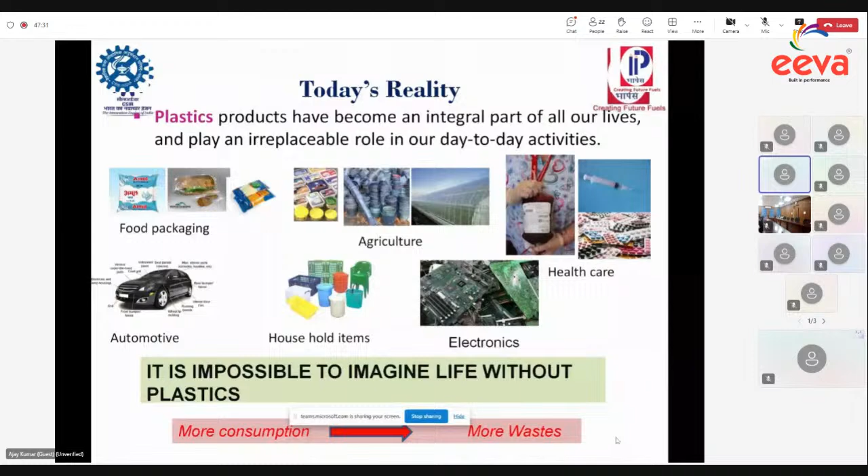Since plastic is non-biodegradable, we have to find a solution for disposal, because it creates problems for our society, health, human beings, animals, and the environment. We have conventional waste management methods like landfilling, incineration, and mechanical recycling, which you are well aware of, so I won't go into detail. Here, what IIP offers is chemical recycling.

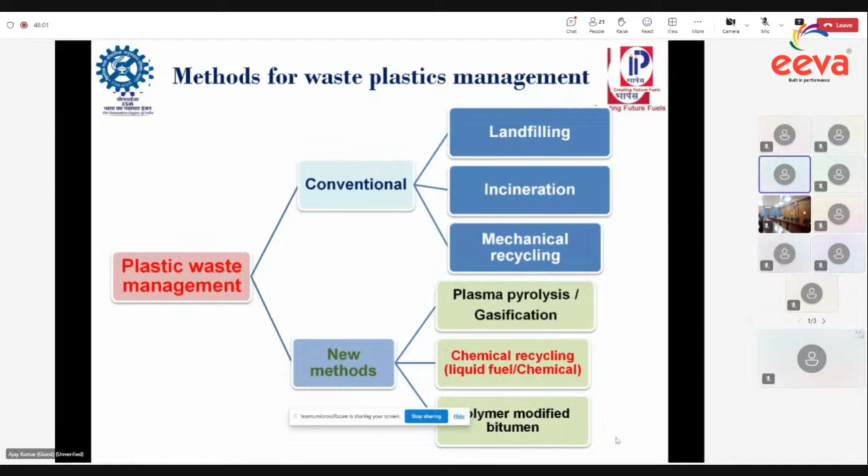So what is chemical recycling? As you know, the origin of plastic production is crude oil, so we want to recycle from plastic back to crude oil. This is the permanent solution. If you see conventional methods like incineration or mechanical recycling, these will not give a permanent solution. Our emphasis is to convert plastic into crude, like pyro oil, and then convert that into useful products like petrol or diesel.

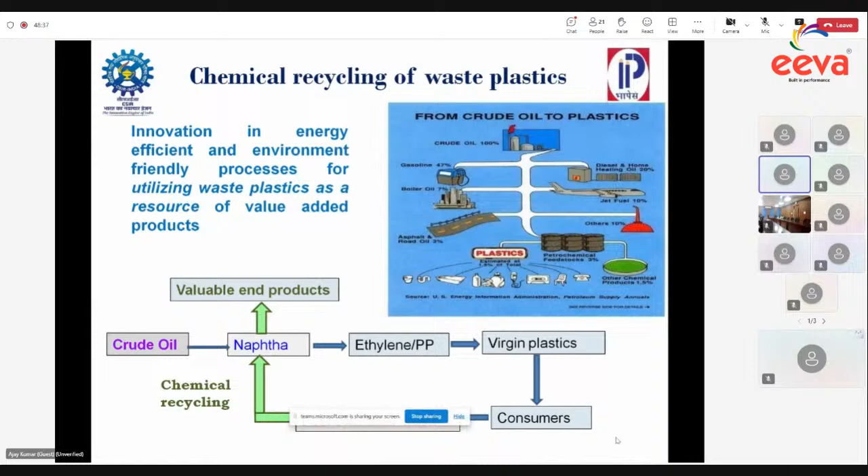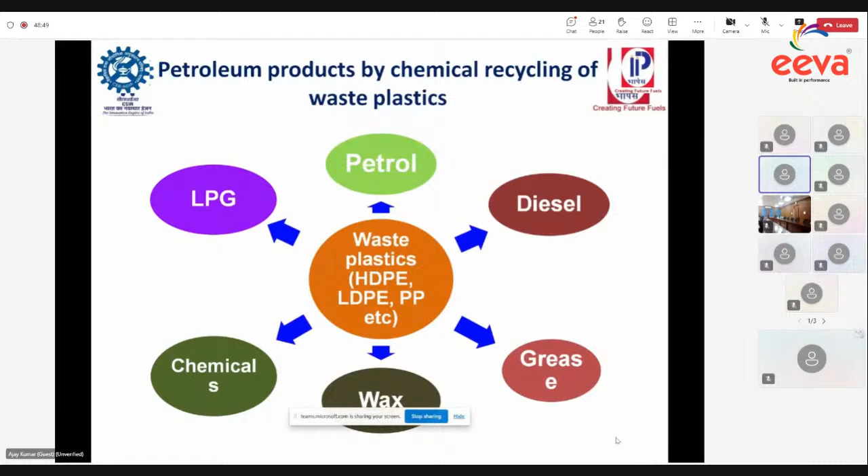So what types of products does IIP offer from chemical recycling of waste plastic? Products like petrol, diesel, greases, waxes, and chemicals.

So what is the CSIR-IIP GAIL technology? What types of feed are required for this process? All polyethylene and polypropylene, PE and PP, are useful for this process. We are avoiding PET bottles and PVC and such plastics, because polyethylene and polypropylene make up almost 60 to 70% of the total MSW plastic. So here we are targeting only polyethylene and polypropylene.

As you know, this MSW plastic contains foreign materials like organic contaminants, so we have to pre-treat this plastic so it can be useful for our process.

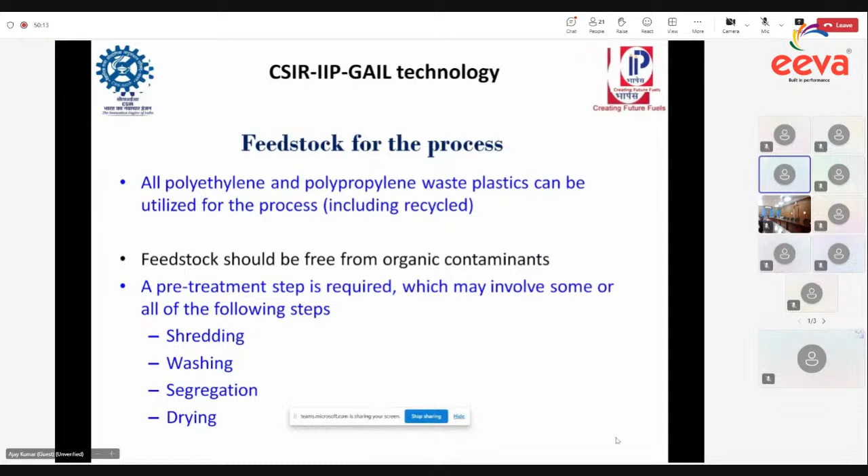There are a number of steps for pre-treatment. First, dust blowing, then shredding of the plastic into smaller pieces, then water washing, then drying, and then agglomeration. These are the steps for pre-treatment of our waste plastic, and this feed is then useful for our process. So what is the CSIR-IIP GAIL technology?

In GAIL technology, if you take 1 kg of plastic, you will get either gasoline or diesel or aromatics along with LPG.

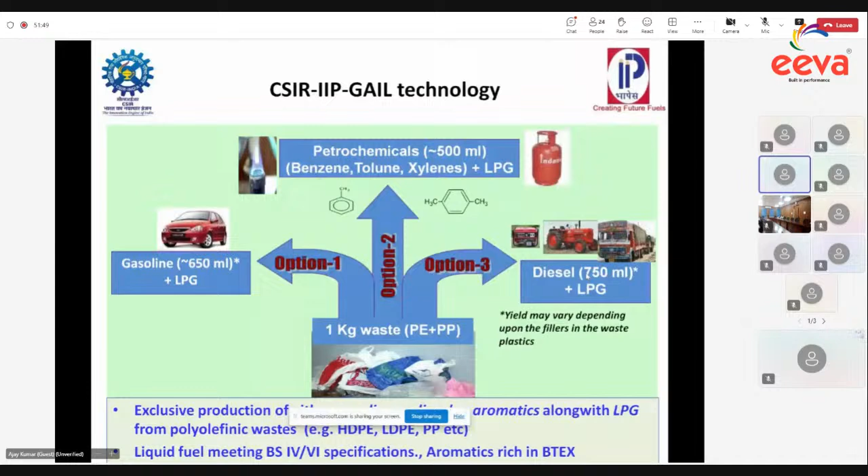So what is the process? Firstly we have to pre-treat the waste plastic, whatever we get from the municipality or MSW, from any source. Then we pyrolyze it, followed by the catalytic reactor, and then fractionation. Then we get products like gasoline or diesel.

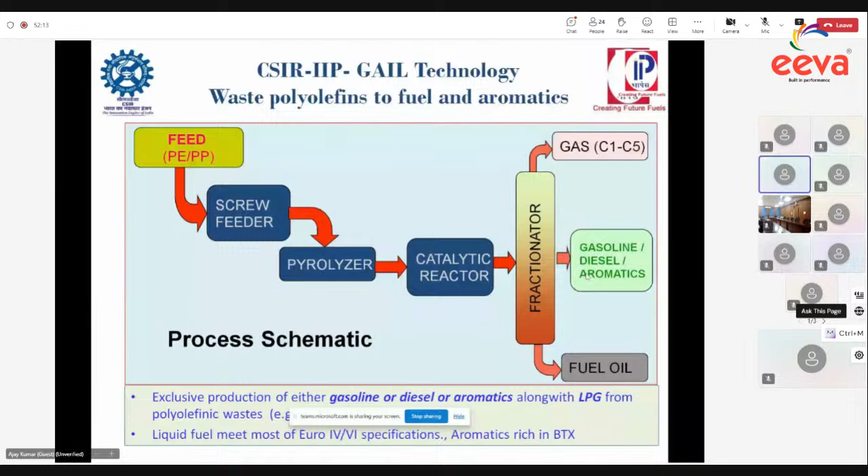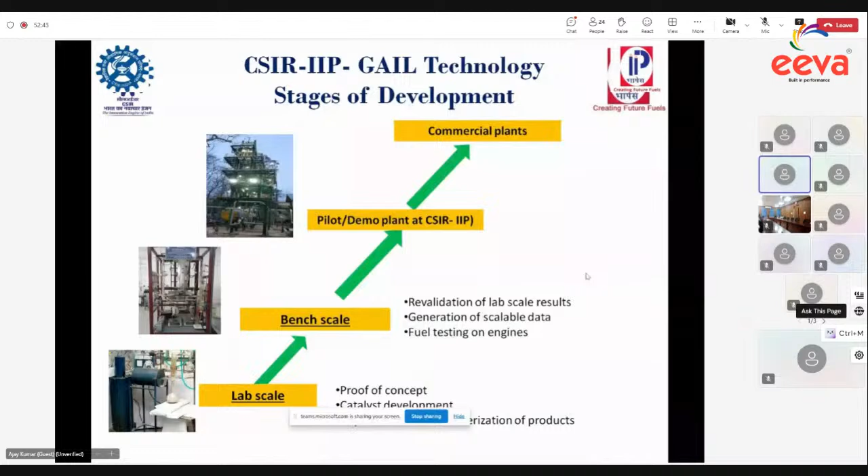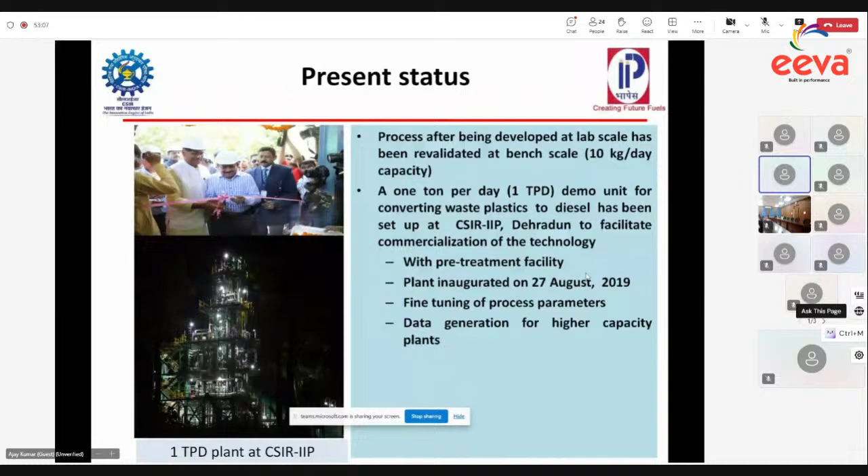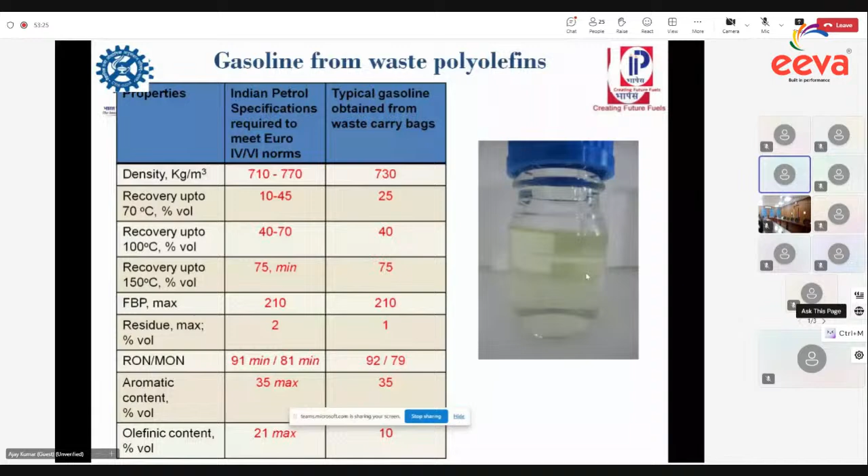These are some properties. As you know, for diesel or petrol we have to meet BS4 or BS6 standard norms in terms of density, viscosity, final boiling point, aromatic content, all these things. In our process, these properties are met. This is for diesel produced from waste plastics.

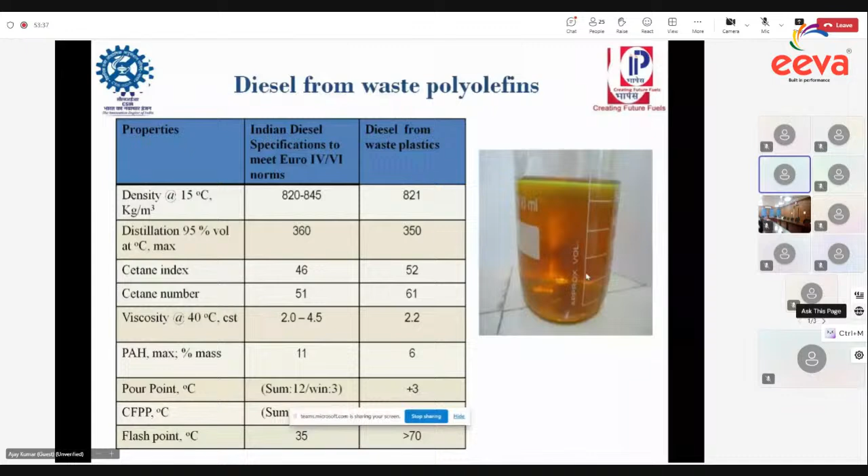We also did some emission performance testing of these waste plastic fuels. We have the laboratory in IIP, so we check emissions like particulates, carbon dioxide, all these things. It is matching with conventional diesel obtained from the petrol pump.

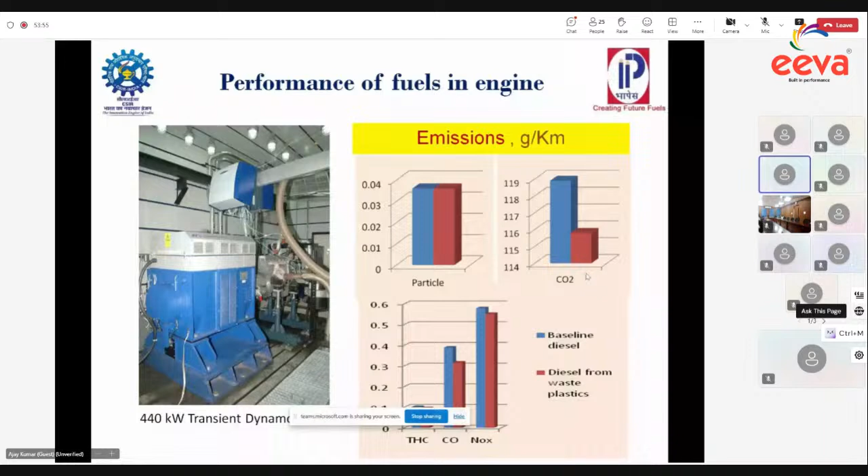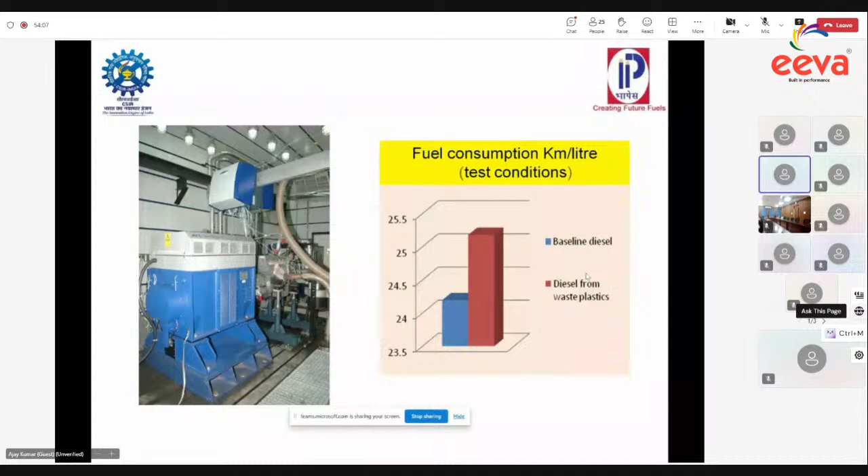This is just the efficiency of the fuel in terms of kilometers per liter. It is at par with conventional diesel obtained from the petrol pump.

We have also developed technology from waste plastic to wax and greases. In terms of economics, we cannot increase the price of diesel or petrol due to social causes. So we have developed a way to produce petroleum waxes or greases which are costlier than diesel or petrol. Their economics is better compared to petrol or diesel. So we have also developed this technology.

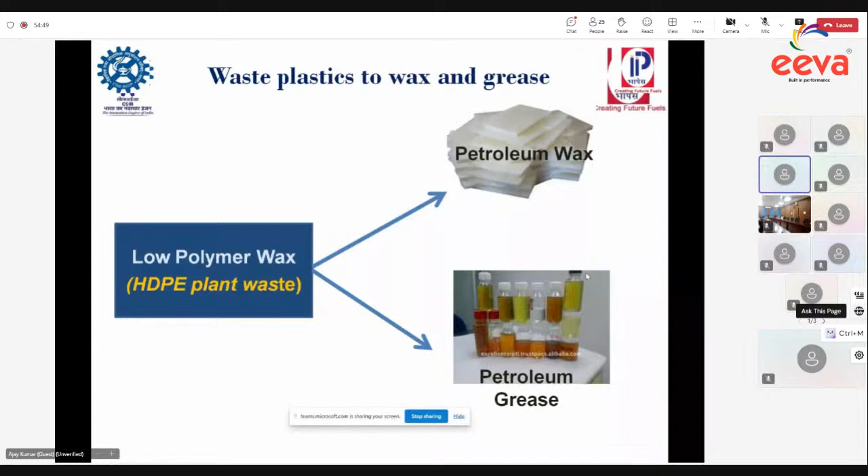In terms of utility requirement, manpower requirement, and land requirement, we need a pretreatment unit as well as a process unit. Land for the pretreatment unit is 2 acres. For the conversion unit, diesel conversion requires 1 acre. We also need electrical power, water, and LPG for starting fuels.

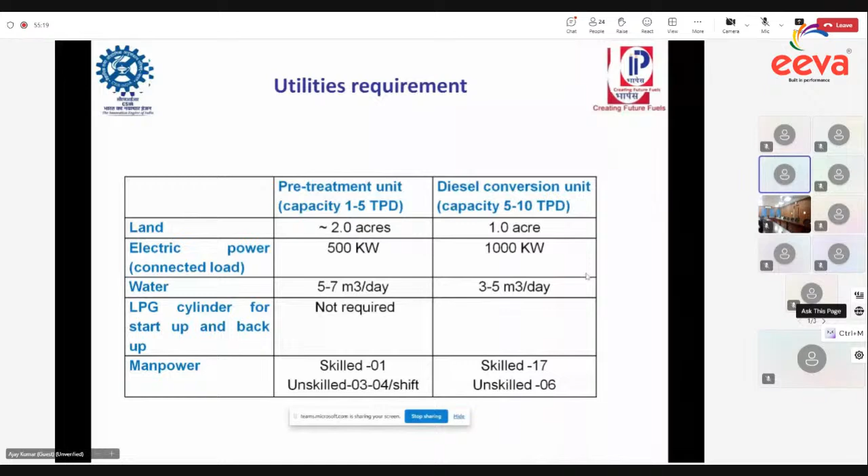So lastly, we conclude that this is the process to produce diesel and petrol and solve the waste plastic disposal problem in an environment-friendly manner.

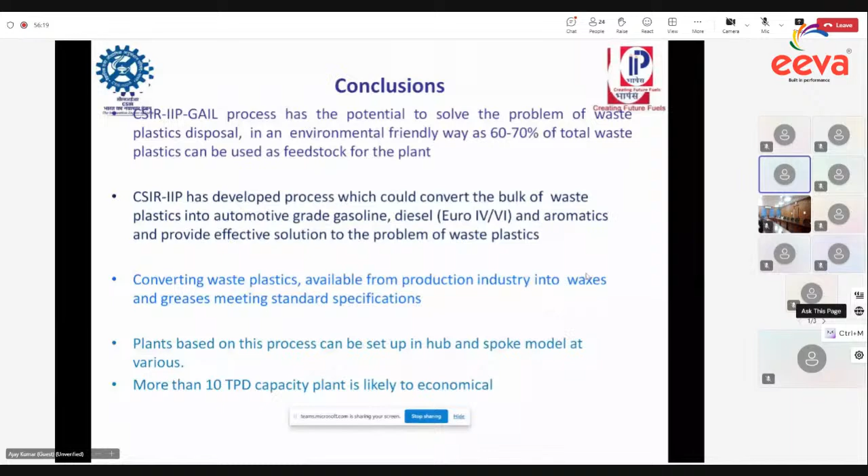So this is the existing facility, as you are seeing the 1 TPD plant. We also have a glass reactor, lab scale reactor, and bench scale system in our IIP campus.

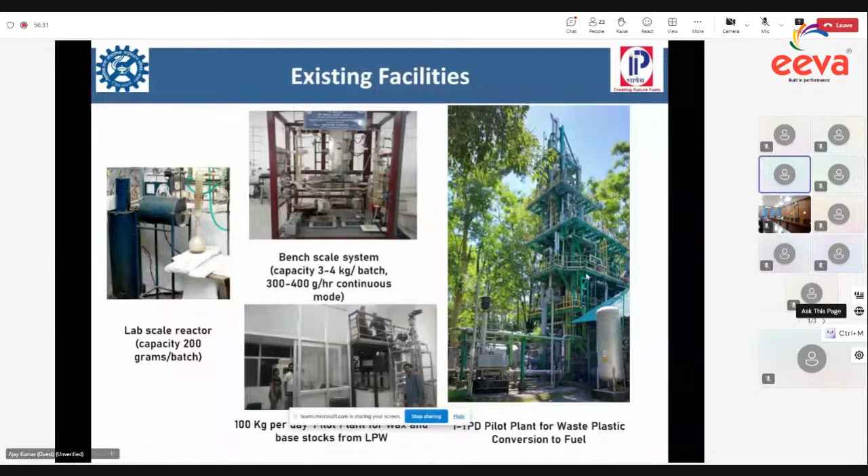These are the teams who are working day and night generating the data. Thank you all, this is it.

Thank you, Dr. Ajay. PPDC Agra, any comments? Or any of your partners, if they want to say anything?

Thank you ma'am, thank you Dr. Ajay. Just one question - I think in the document we received regarding this idea, the capex investment is around 70 crores. Is it so? And the operational expenses mentioned in the document is 11 crores.

Yes, this is for a 10 TPD plant. Okay, so this is about a 10 ton per day plant. Okay, thank you.

This plant is like this - if you come to IIP and want to see the plant, it is like a refinery because we are producing automotive grade fuel like diesel and petrol. So it is like a refinery. There are lots of equipment, and we have to maintain safety, all these things, when setting up the plant. It is not like the conventional plants you may have seen from China - it is not like that. So you are welcome to visit IIP Dehradun to see the plants and get the feeling of them.

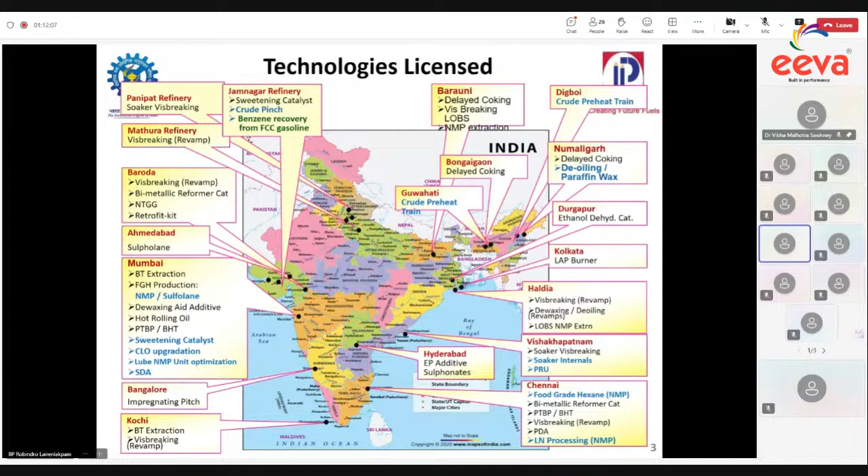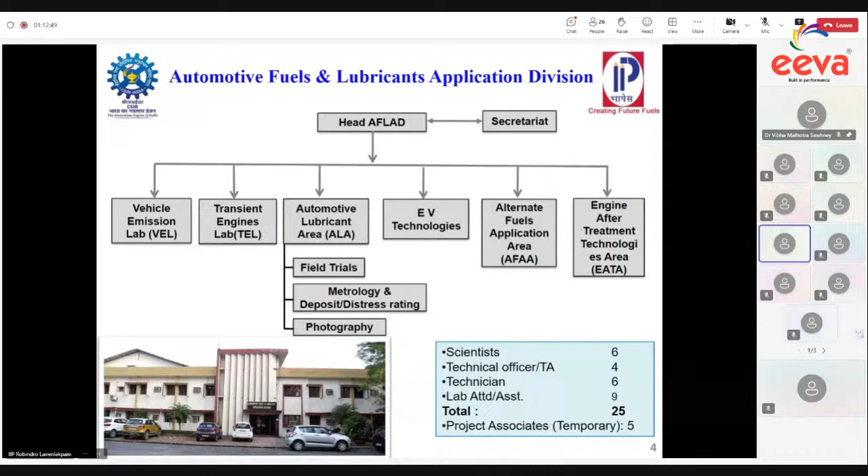Moving on, we have different divisions, and the division where I belong is called Automotive Fuels and Lubricant Application Division. We deal with the applied area where different fuels are tested for their performance and compatibility with materials and so on. You might have heard of E20, E10, plus the upcoming flex fuel. So there, your petroleum product is not 100% - it has been mixed with the alternative fuel so that we reduce the petroleum product.

And the introduction about our technology: there are thousands of diesel autos of L5 category already on road, and they are causing noise as well as air pollution in cities, including capital cities, tier 2 and tier 3 cities, which lead to associated health issues, because diesel autos are emitting high amounts of PM10 and PM2.5. Those emissions are very harmful to human health.

So we have devised one device which is still under evaluation stage, and with such an indigenous device we can convert existing diesel autos into electric autos, which will mitigate the unhealthy level of air and noise pollution in state capitals as well as tier 2 and tier 3 cities. Apart from that, this product will be import substitution, and it aligns with India's energy independence goals of Viksit Bharat as well as Atmanirbhar.

It will also contribute to our target of 30% electric vehicles on road by 2030. At the same time, this kit can be used for any new electric autos designed and developed by different entities. So this kit will be common for two purposes - one is for new three-wheelers, and one is for electrification of existing diesel autos into electric vehicles.

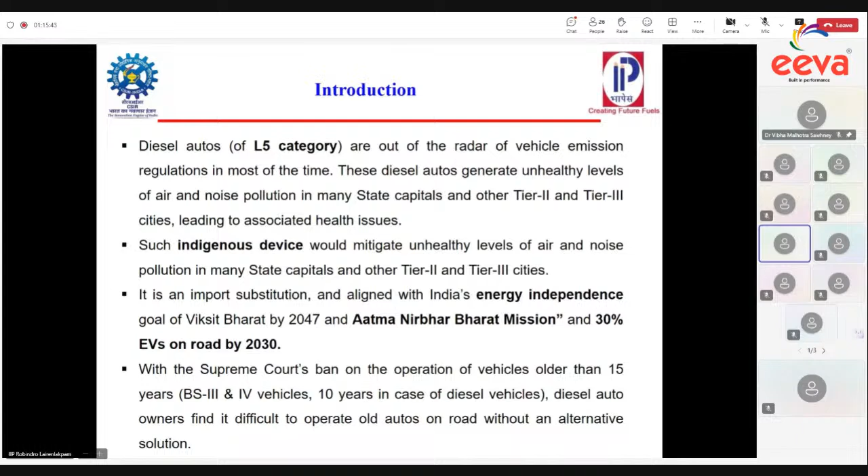So this is the problem. At the same time, with this kit, we are extending the operational life of the diesel autos, and giving more earning time for the owners and the diesel auto operators.

Our target is to have the L5 category vehicle, L5 passenger as well as cargo. The cargo vehicles are used for last mile delivery by different commercial platforms like Amazon, and at the same time for new auto rickshaws.

So just to understand the subsystem level, this diagram shows you how the subsystems are mounted inside a vehicle, and what are the major subsystems. We have the major parts: electric motor, electric drive, a controller, battery, then DC-DC converter, then vehicle electrical appliances. These are the major parts of an electric vehicle.

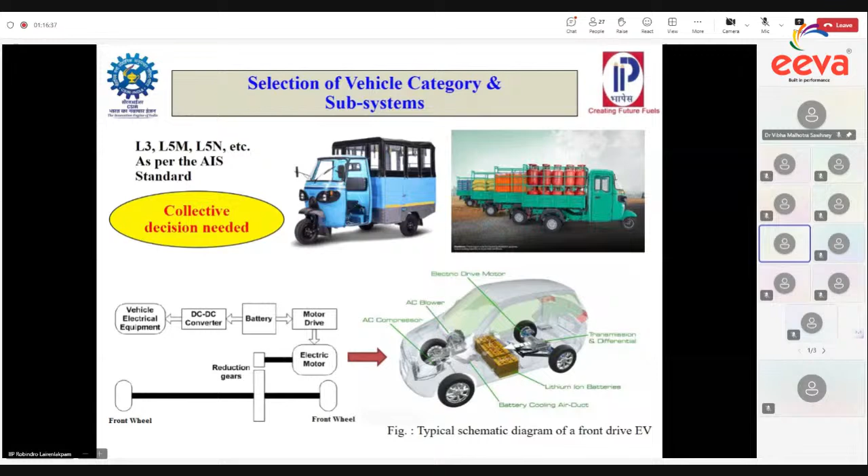Moving on, we need to have a thorough study for the EV motor selection, depending on the vehicle category, whether it is cargo or passenger, because the weight and other vehicle dynamics will be different. So the selection of EV motor is very important from the perspective of sustainability and efficiency.

From the sustainability perspective, permanent magnet motors are not going to be sustainable because of the use of rare earth material, which is not much available in India. So at the end of the day, we may be importing the rare earth material, the magnets, from other countries, and then we'll end up with another problem. That's why in our study we are using non-rare earth electric motors, so that it will create a sustainable ecosystem for electric mobility.

While selecting and designing the electric motor, we need to see certain factors like frequent start-stop, high rate of acceleration and deceleration depending on different drivers' behavior, then high torque at low speed, for example hill climbing or flyover climbing, which we call road gradient in technical terms, then low torque cruising. These are all factors we need to consider.

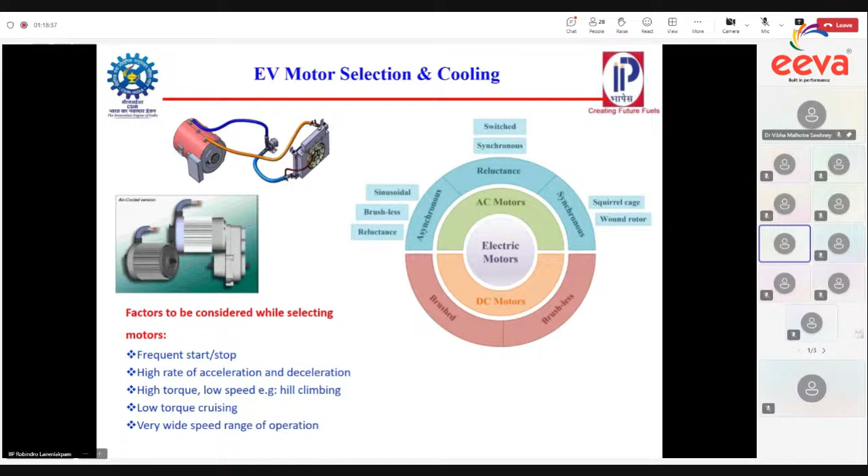We need to see a very wide speed range of operation, so that we can have at least 50 km/h speed. Otherwise, unlike e-rickshaws which have a regulatory limitation of 25 km/h, that causes traffic jams and other undesired things on the road. So these electric autos are different from electric rickshaws because of the load carrying capacity as well as the vehicle speed.

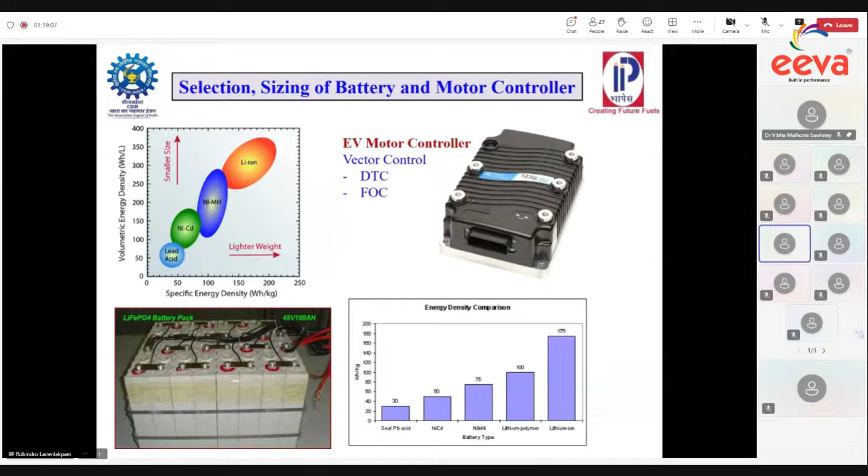Moving on, the selection and sizing of the battery is very important, depending on how much electric mileage we are targeting to achieve - for example, 100 kilometers, 150, or 80 kilometers, and so on. We are using lithium-ion batteries because of the high energy density with a smaller size and many other advantages.

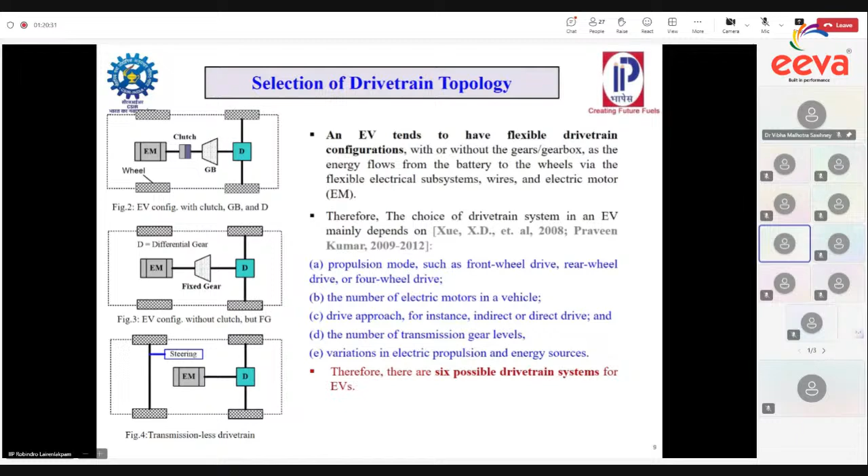Moving on, the fourth one, we are using two electric motors with one common drive shaft. The presence of two electric motors will make it more expensive, and will make the control algorithm very complex.

Then the fifth one, we have two electric motors individually and independently connected to its rear wheel, through a reduction gear. Again, this is all for study and research purposes - commercially and physically it is not available. And the last one, again, we are using two hub electric motors.

The wheel rim itself is the motor, like in an electric two-wheeler or scooty. So these are the different topologies based on our requirement and the techno-economical analysis. We need to select the appropriate topology for our new kit as well as for our new electric vehicle.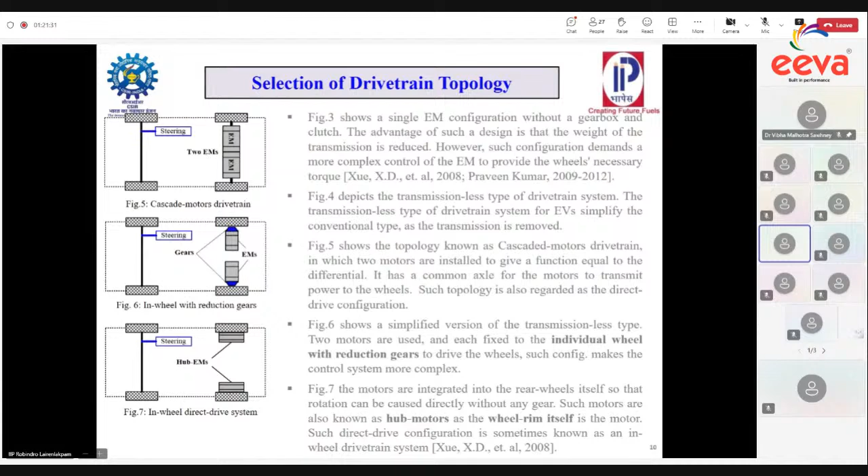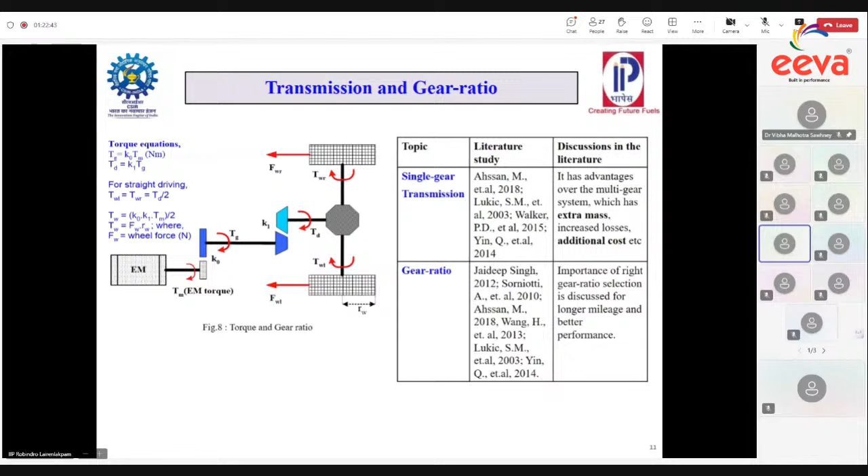Moving on, this is research we did a couple of years ago to check the feasibility of converting an existing IC engine vehicle to an electric vehicle. This was done as per the gazetted notification GSR 167E, which allows converting any existing IC engine vehicle into an electric vehicle, subject to approval and certification of the kit. This conversion process is done as per Automotive Industry Standard 123 Part 3.

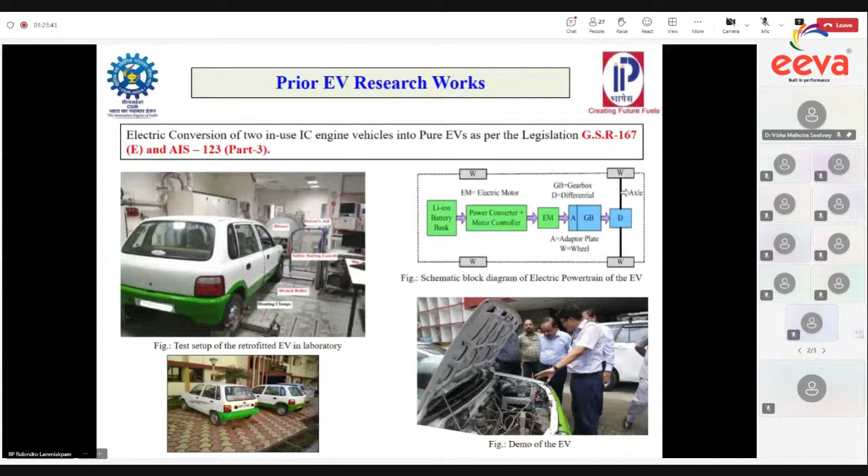This is what we have done in our lab, and we found it very much doable, with a lot of advantages from the techno-economical perspective. As part of that prior research work, we have done these experiments in the laboratory and on road.

Once converted, the vehicle is subjected to road load simulation on a chassis dynamometer and driven with Indian driving cycles common in the automotive industry, like IDC and MIDC, modified Indian driving cycle. We have used different equipment to check vehicle dynamics, safety, and stability.

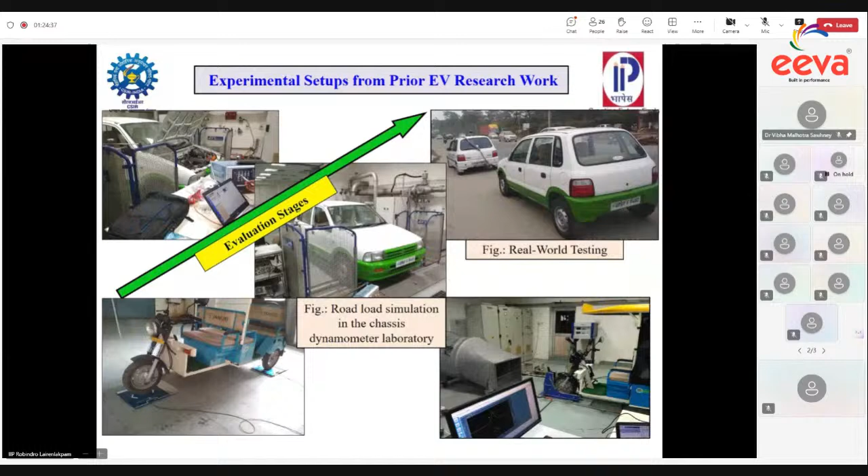For example, once you remove the IC engine and related parts, the original vehicle dynamics is disturbed, so we need to bring the center of gravity back to its original position. That's why we need to measure the new center of gravity, and so on. Then we need to determine new parameters for the retrofitted as well as the new vehicle, like the tractive force, vehicle reference weight, new center of gravity, and so forth.

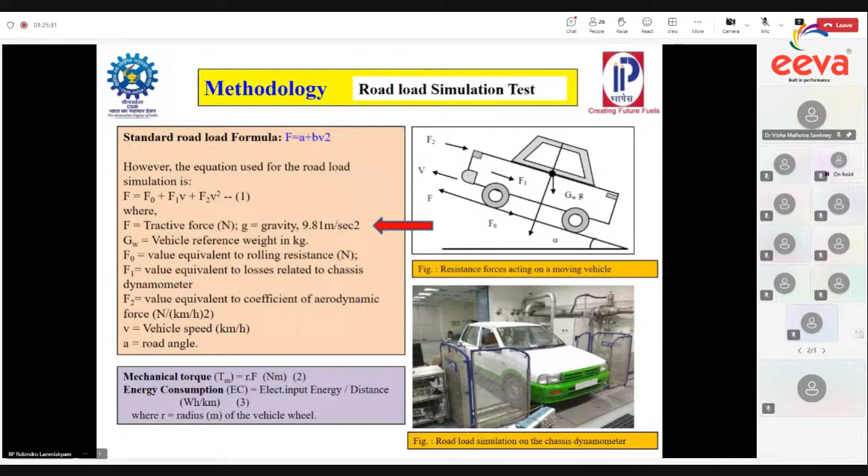Moving on, we used the modified Indian driving cycle during the laboratory test. Throughout the cycle, we collected and recorded electrical parameters like current and voltage of the electric vehicle. Then we analyzed areas of improvement, energy consumption, maximum current flow, and so on.

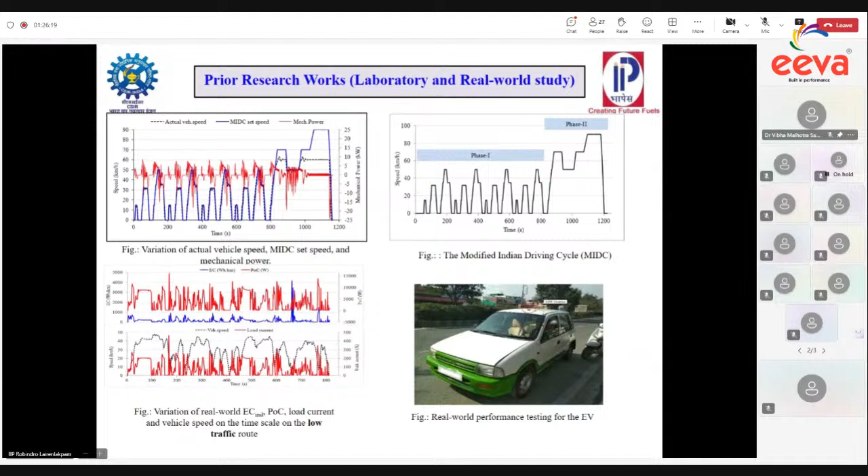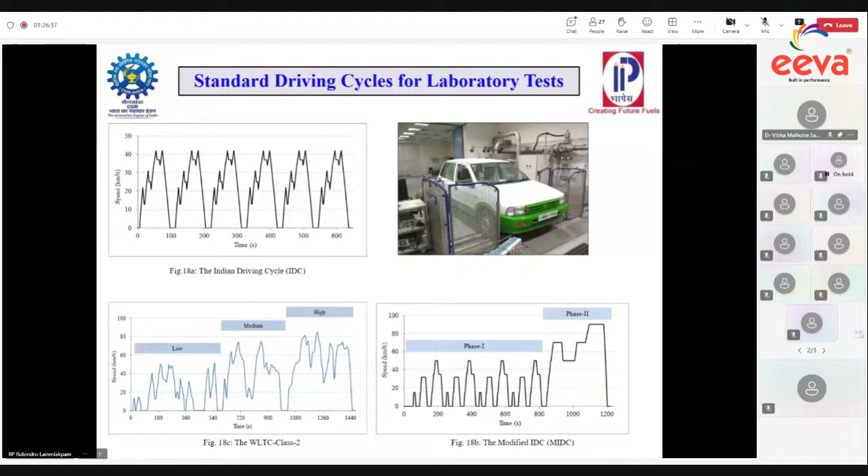Likewise, the same vehicle is put through a real world test on actual road. We observe energy consumption and other electrical parameters, then compare the laboratory data with the real world data to find the gap and make improvements. These are the standard driving cycles used in our laboratory and across all automotive industries in the country. WLTC is the new cycle used worldwide, and India is now going to adopt it.

This is a very important part: once we have the new or retrofitted vehicle, it has to go through regulatory compliance tests, using all the methods defined under the Automotive Industry Standard. It has to pass these tests, and only then will testing agencies give certification for launch and commercialization.

This is done under the CMVR homologation requirement, the Central Motor Vehicle rules homologation. There are many legislations and procedures that need to be followed for new vehicles as well as for retrofitted vehicles. For retrofitted vehicles, we need to go through AIS 123 part 3, which defines what to do and what procedures to follow.

Our target is to have the landing price around 1.5 lakhs per kit. This target is driven largely by battery cost. Batteries are not mass produced in India right now; mostly they are imported, though certain companies are manufacturing in India with Indian technologies. Once battery cost is reduced significantly, the cost of the kit will also get reduced.

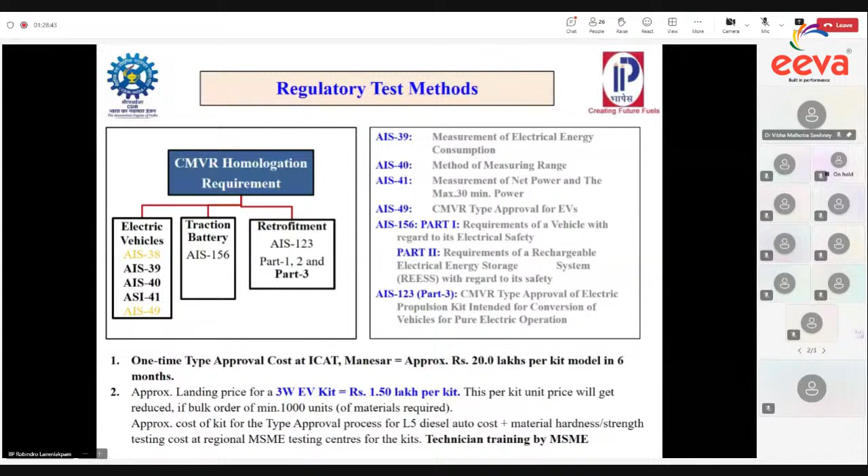At the same time, during retrofitting, technicians and fitters need to be trained on how to fit, repair, and maintain these systems. Such training can be conducted at regional MSME centers through MOUs, utilizing their existing infrastructure for subsystem fabrication. We can work with MSMEs for human resource training and for imparting subsystem-level training on handling, repairing, fitting, and related tasks.

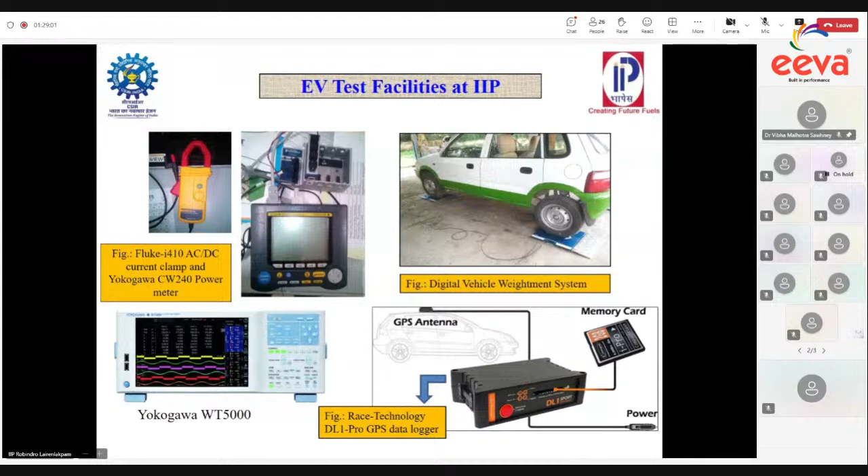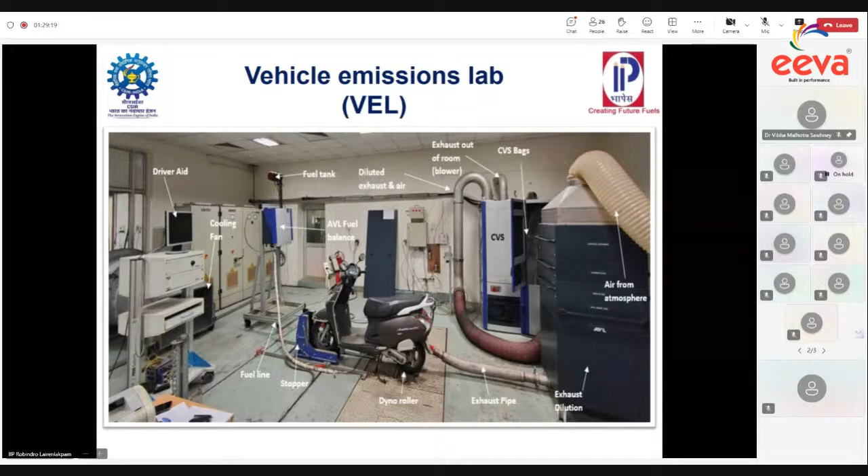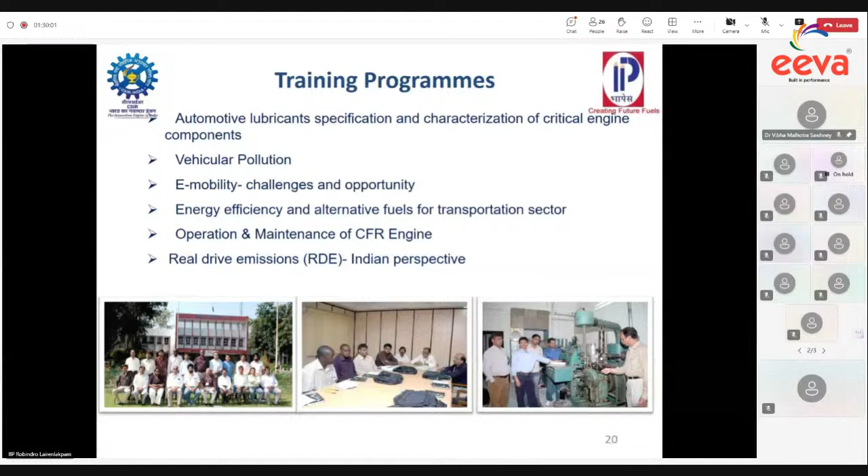Our division also conducts training courses every year. Even now, some transport officials are on our campus, and we are imparting training to them, sharing the latest policies, updates from the ministry, and the latest technology. This is one area where we can collaborate with MSME centers for training technicians and fitters.

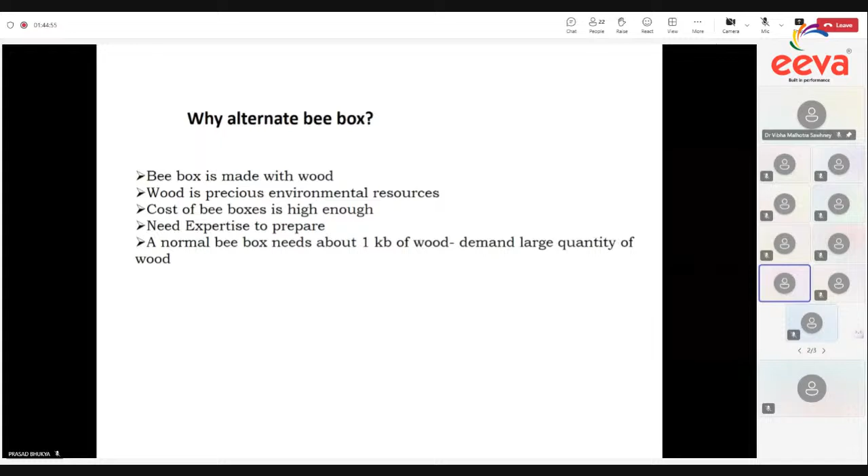It needs some skill to prepare the bee box. Although in India we know different measurements of honeybee boxes, like A type, B type, it needs some skill to prepare these boxes. That's why we thought of some innovation regarding low-cost honeybee boxes. So this is a low-cost bee box, and we completely removed the use of wood.

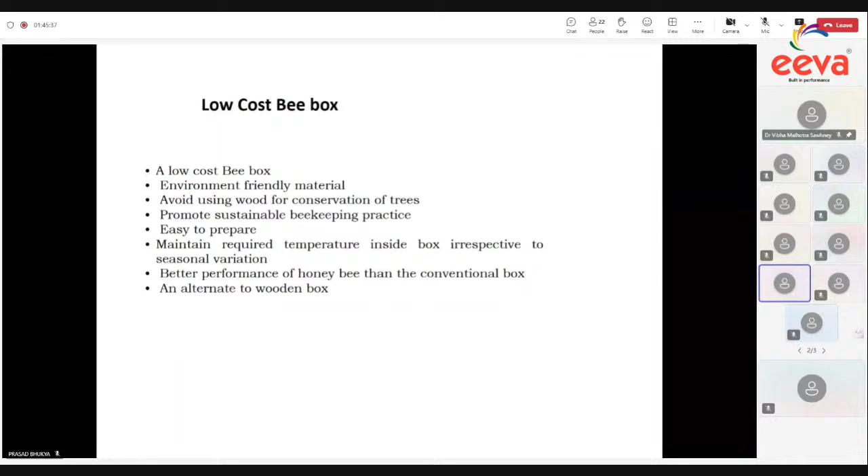We completely removed the use of wood in these bee boxes. Whatever material we use is environment friendly, basically bamboo based, which helps for sustainable beekeeping practices. The bee boxes are easy to prepare because the measurements we took are as per Indian standard. We have not changed any measurement for Apis cerana or Apis mellifera; we just substitute the material, using other material instead of wood.

As per our past experience and research, these new honeybee boxes completely maintain the temperature inside, because temperature and humidity are very crucial for honeybees, as honeybee is a poikilothermic insect so temperature is essential. Irrespective of seasonal variation, it maintains the temperature around 32 to 33 degrees Celsius, and it gives somewhat better performance than conventional bee boxes.

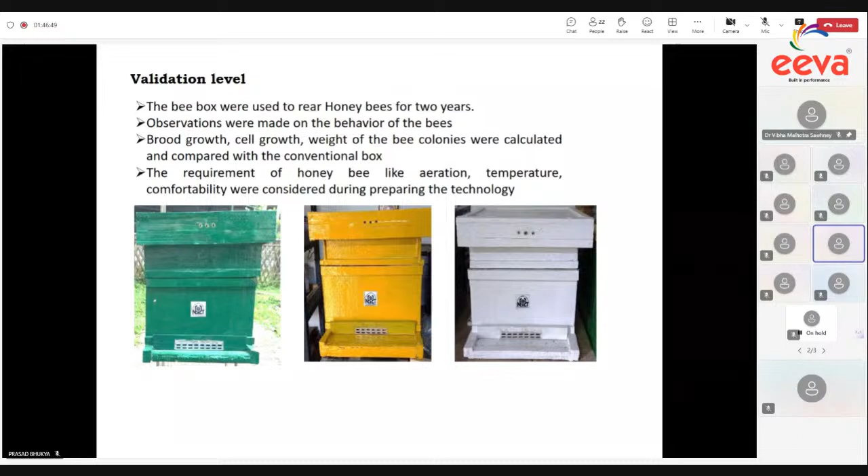You could see some of the bee boxes here. The box we use to rear the honeybee Apis cerana, because Apis cerana is very much prevalent in the Northeast, and we observe the behavior of the honeybee, because this is very important.

You may have heard that around 30-40% of honeybee colonies are now disappearing from beehives. We completely observed the behavior, and it is very clear and good, because we got very good brood growth, brood health, cell growth, and weight of the bee colonies. Compared to conventional bee boxes, it provides complete aeration, temperature, and comfortability, which is very much required by the honeybee.

These are our new bee boxes we prepared, and these have already been commercially transferred to 4 parties, basically NGOs and self-help groups. Some photographs are shown here; they prepare these themselves and distribute them to farmers for rearing honeybees.

One advantage is that it is very easy to prepare. You do not need any industrial scale concentrated unit of production, because if we teach the farmers, they can prepare these themselves.

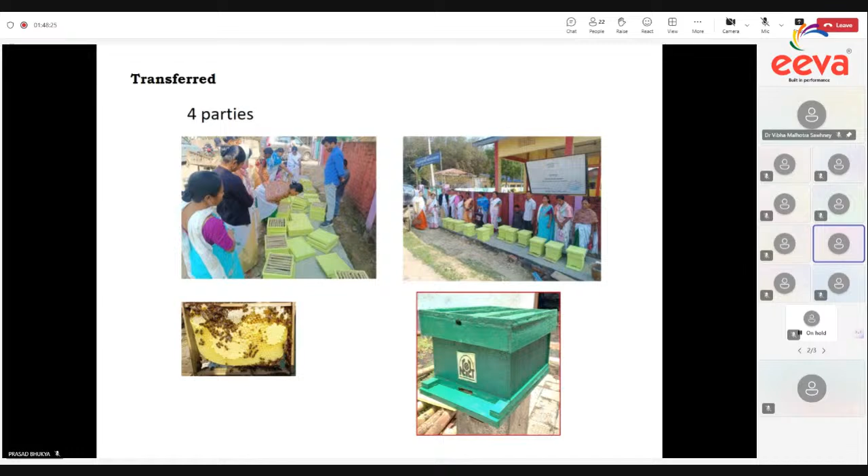These are some photographs I've shown you, already transferred to different NGOs. Here is another of these bee boxes, where you can see how it facilitates colony growth.

These honeybee boxes were inaugurated by our former Director General Sir in October 2021, who formally inaugurated these honeybee boxes. You could see here that in our farm we maintain several such bee boxes along with honeybee colonies.

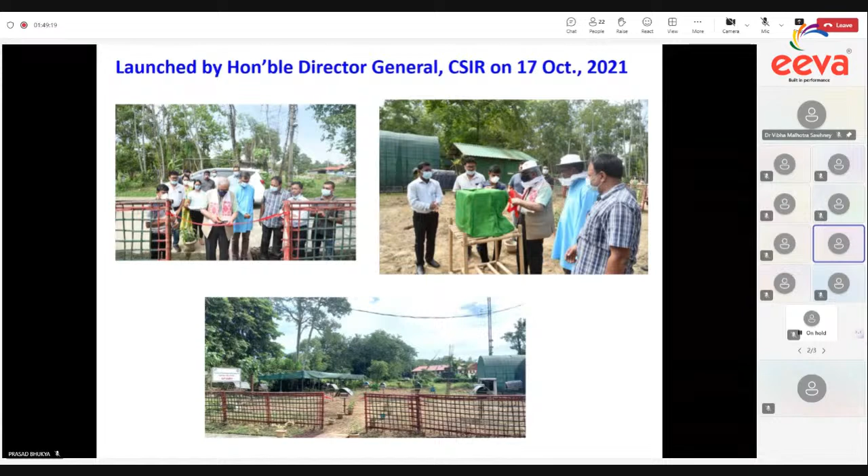So this is briefly it. I'd like to inform about the new honeybee boxes - we are now preparing these Apis mellifera bee boxes, which we plan to send to Lucknow to CSIR-NBRI for a CSIR floriculture mission project, and it is prepared by one entrepreneur in our facility under our supervision.

Another two parties, one from Chennai and one from Assam, have already applied for getting this new technology. So briefly, this is it, but I am open for any questions.

Good afternoon, I am going to speak about Expert Eye-on-Pellet technology - the automatic process control system for pelletization disc in steel industry. Myself, Dr. Santosh Kumar Behera, and with me Dr. Debi Prasad Das, my head, is available here.

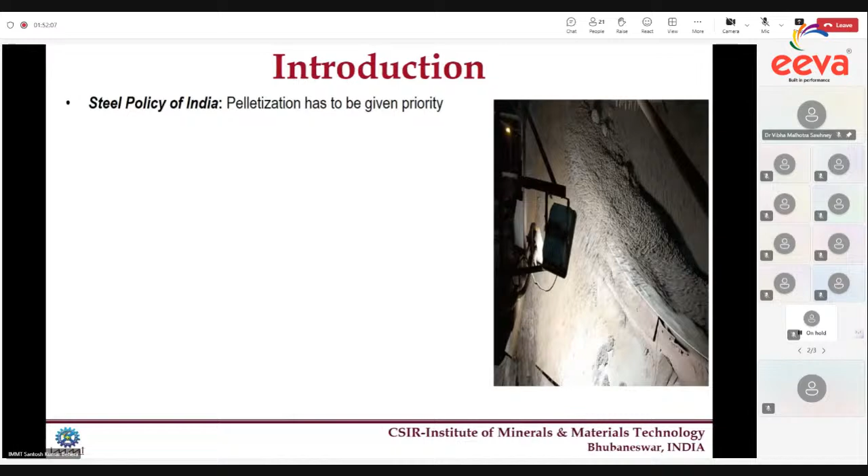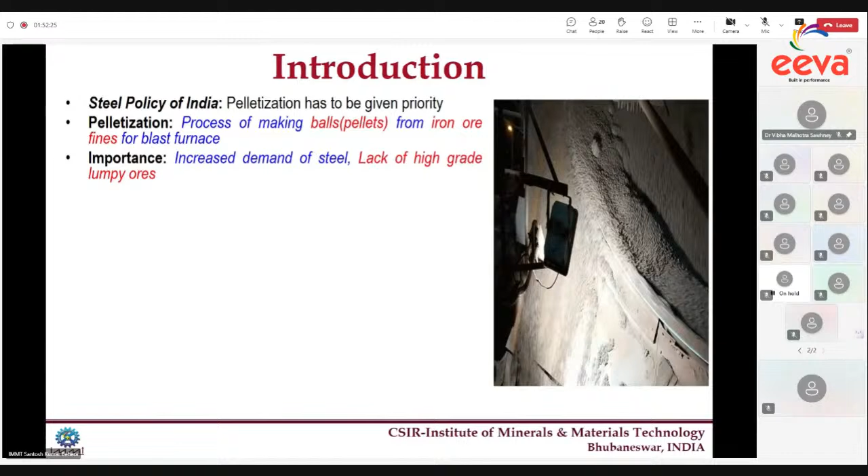Before going to technology, I'll explain pelletization and its importance. As per steel policy of India, pelletization has to be given priority. Pelletization is a process of making balls, called pellets, from iron fines for blast furnace. There's increased demand for steel, but a lack of high-grade lumpy ores - we are getting fines and low-grade iron ores. The pellets formed by rotating disc are sieved to desired size, which is 8 to 16 mm; less than 8 or more than 16 is undesired.

You have to recycle once again. That is, we call less than 8 undersize, and greater than 16 mm oversize. Our objective is to increase the desired size range, that is 8 to 16 mm, to maybe 90%, and we have to reduce the recycle load. It is a very complex process, and the size depends on ore type, moisture content, binder type, RPM (rotation of disc), TPH (feed rate), and angle of inclination of disc.

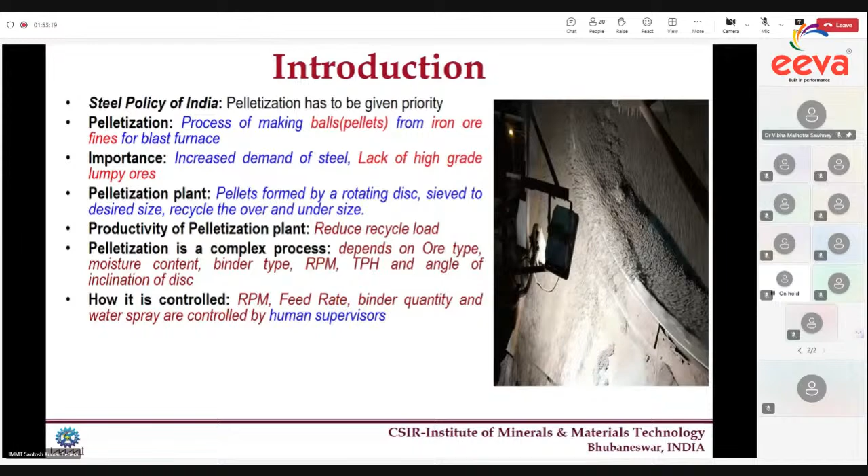So how is it controlled now? One human supervisor stands watch, and there are 6 discs in one plant. He observes the pellet size with his naked eye to check whether it's the desired size, or whether it's increasing or decreasing. Then he tells the control room person to change the RPM and TPH. This leads to a lot of human error and makes it difficult to make decisions on multiple discs.

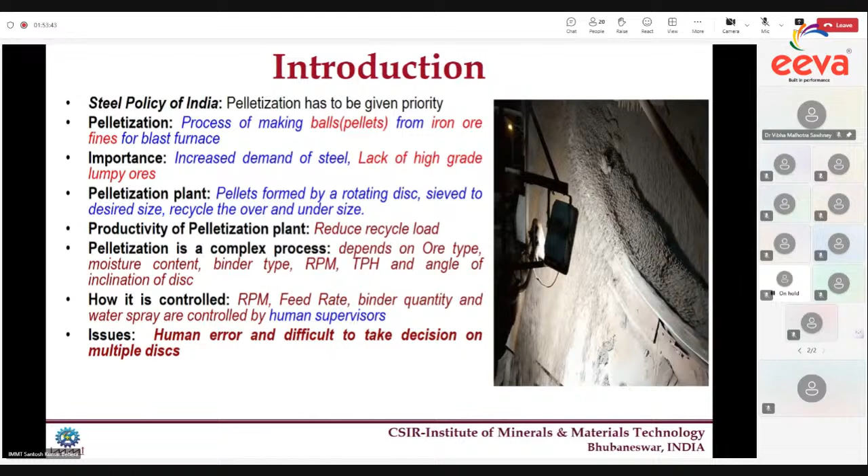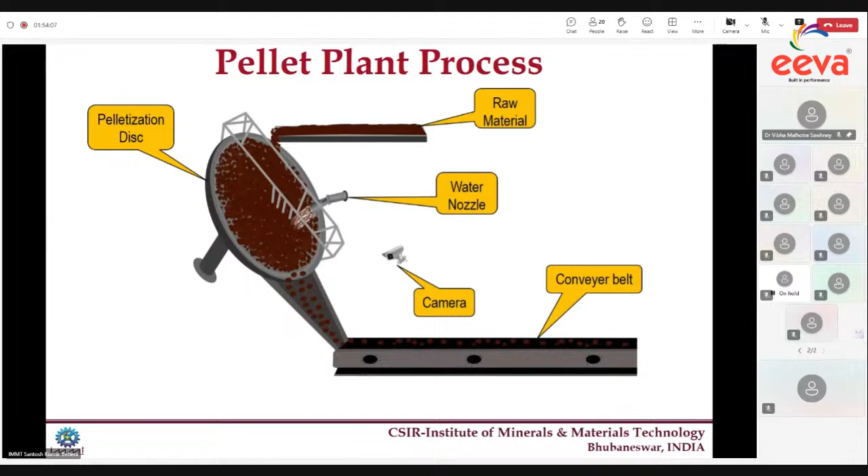This is the pellet plant process. One disc is there, and iron fines are fed by conveyor belt onto the top of the disc. There is a binder and a water spray by water nozzle, and due to rotation, the pellets are formed and fall onto the conveyor belt. At the discharge end, we are capturing the image.

The application is the monitoring and control of pellet discs used in steel production. We named it technically Expert Eye-on-Pellet. Status: we have already filed a patent and it's already granted. Iron ore pellet manufacturing industry, generally steel industry, will use this technology.

As already mentioned, pelletization discs are controlled by a human operator, who watches the disc to visually estimate the size of green pellets and control the disc parameters manually. They work in 3 shifts in a very dusty and noisy area. Pellets of the desired size, that is 8 to 16 mm, are not always possible to produce through manual control.

Our approach is a camera-based vision system for real-time size analysis, and a rule-based expert control system to control the disc parameters, that is RPM and TPH, and we are controlling through the DCS system of the plant.

This is a semi-automatic control system which will control RPM and material feed rate. The benefit of this technology to industry is auto control helps in eliminating human errors, increases production, and also avoids exposure of human operators to the dusty and noisy environment at the plant site.

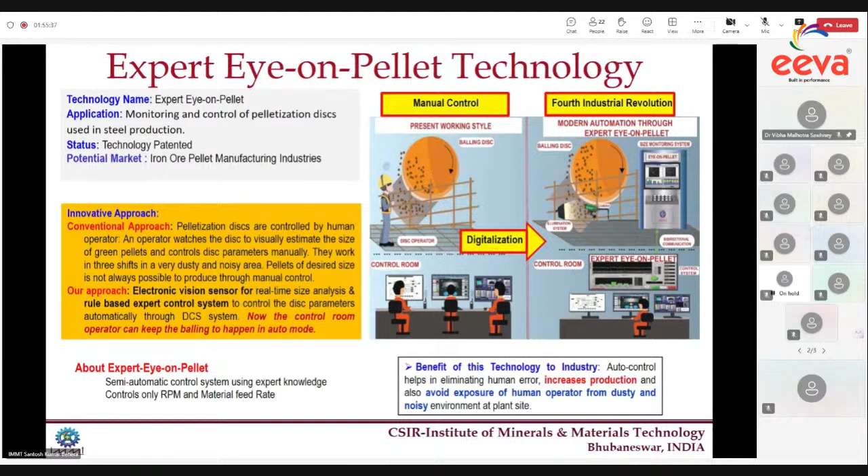We have already filed 2 patents, one for the monitoring system, another for the control system. You can see this pellet disc rotating at a certain speed, and we have installed a camera at the discharge end with an illumination system. We continuously capture images and do image processing, and we determine the size distribution, that is less than 8, 8 to 10, 10 to 12, 12 to 14, 14 to 16, greater than 16, in terms of weight percentage.

This camera is connected to the local monitoring system called Eye-on-Pellet. This Eye-on-Pellet system connects to the control room through OPC communication via fiber optics, and there is a controller available in the control room, and that controller is connected to the plant DCS system.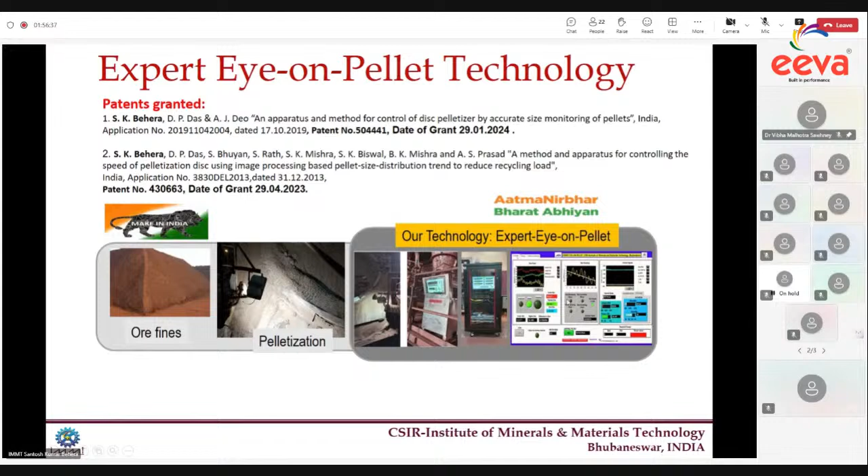On the right side is the GUI of our control system. This is the architecture of our control system. Here you can see a camera capturing continuous images. The camera is connected to the monitoring system, that is the Eye-on-Pellet system. One PC or embedded hardware will be there, which will determine the size distribution in different size ranges. This monitoring system is connected to the Expert Eye-on-Pellet system through OPC communication.

This Expert Eye-on-Pellet control system takes size information from Eye-on-Pellet, as well as RPM and TPH values of the disc from the plant DCS system. On the right side is the plant DCS system, which gives the sensor values of RPM and TPH to the Expert Eye-on-Pellet, and Expert Eye-on-Pellet gives the command to the DCS system to change RPM or TPH as per requirement.

A simple PID control cannot work here. That's why we developed the Expert Eye-on-Pellet system. Here only one bottleneck is there: the plant DCS system is very old technology, and we have to interface our Expert Eye-on-Pellet system to the plant DCS. We are using OPC UA communication, while the plant has OPC DA communication. We have to synchronize these two things properly, and we are doing that.

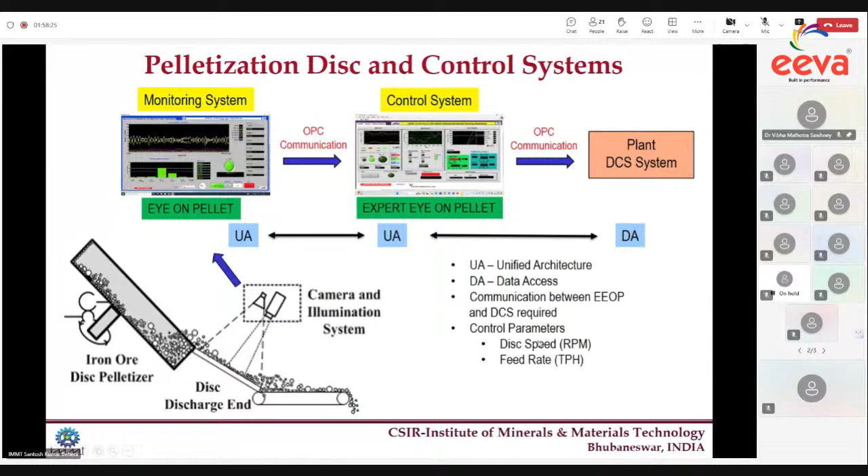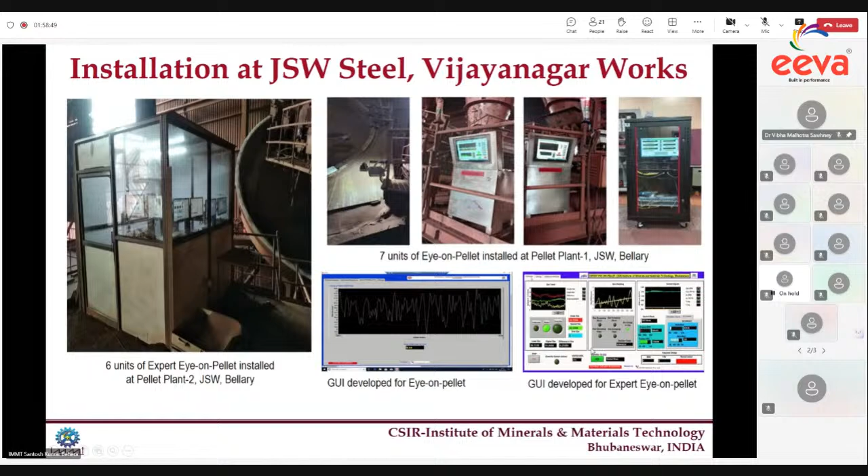This system is already installed at JSW Steel Vijayanagar, where they are using this technology and plants are running in auto mode. You can see here there is a disc and a camera, and this is a local monitoring system for the Eye-on-Pellet system. This is the server, and here is the GUI of the Eye-on-Pellet system, and this is the GUI of our control system, the Expert Eye-on-Pellet system.

The major plant equipment and machinery required for this system includes one camera with enclosure and a computing platform, that is a PC with embedded software. We use two units, one near the disc and another in the control room, along with a display system, NI LabVIEW runtime software, NI Vision Acquisition runtime, NI OPC UA toolkit for deployment, bidirectional communication setup with the existing plant DCS system, communication system, and accessories for mounting and installation.

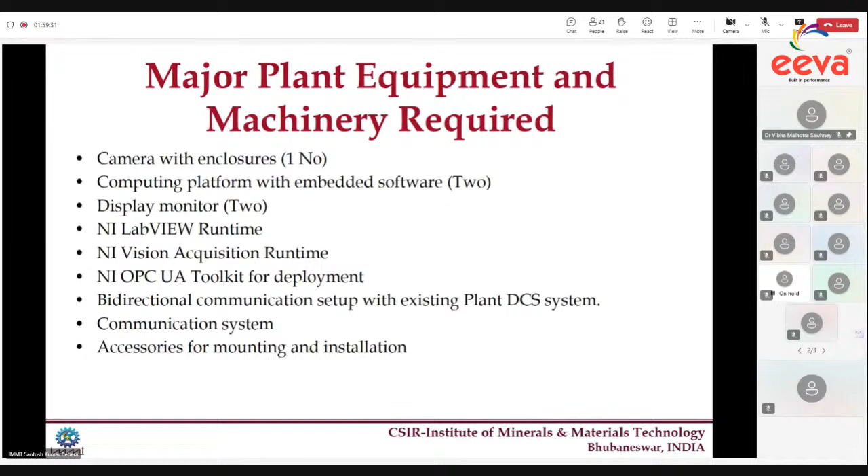Advantages include a multi-input and multi-output controller for controlling the parameters of the iron ore disc pelletizer, an expert knowledge-driven rule-based controller for controlling the rotational speed and feed rate of the pelletizer disc, bidirectional communication and integration with the existing DCS, and the option for switching from auto control mode to manual control mode in the DCS.

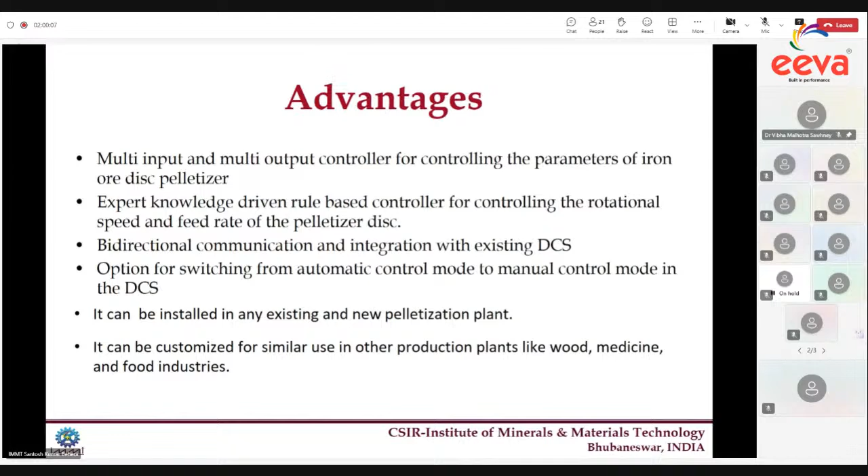We have two options. When there is a problem, we can switch over to manual control mode. It can be installed in any existing or new pelletization plant, and it can be customized for similar use in other production plants like wood, medicine, and food industries.

We already transferred the technology to SVNT Infotech Private Limited, and that duration is already over as of February 2024. The technology has been commercialized at JSW Steel Pellet Plant 1 Bellary, JSW Steel Pellet Plant 2, and BMM Ispat Limited Hospet.

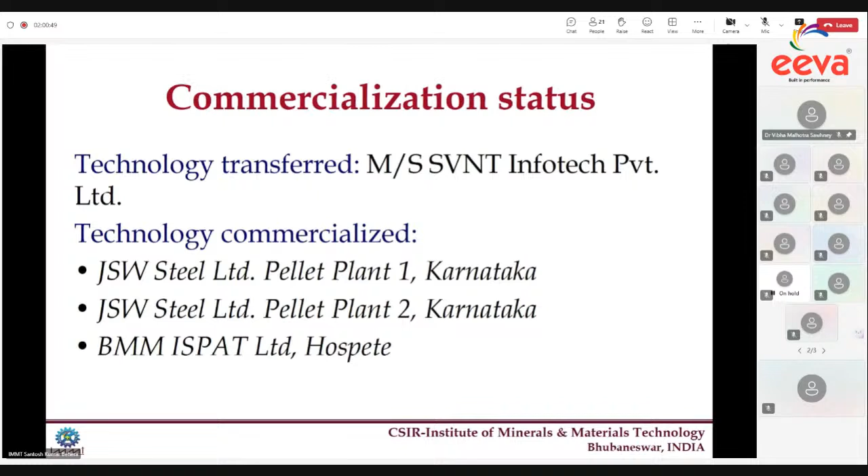We are competing with the Outotec Metso company. Worldwide, only one company has such a product, that is Outotec Metso, a Finland-based company. Due to our technology, they reduced their price, but still we are becoming L1. We already got an order worth around 4.5 crores for this technology, and there is a lot of demand for it.